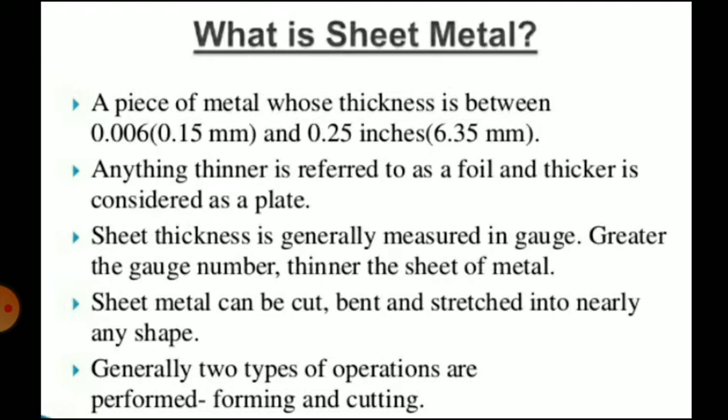Generally two types of operations are carried out on sheet metal: forming and cutting operations. Press working may be defined as a chipless manufacturing process by which various components are made from sheet metal. This process is also termed cold stamping.

Press working operations are carried out with the help of a metal forming machine called a press, which shears or forms the component by applying force. The main features of the press are a frame which supports a ram or a slide, which can move in an upward or downward direction.

Then a bed, which is a stationary member on which the die block is placed, and a source of mechanism for operating the ram in line with and normal to the bed. Source of mechanism means you can employ hydraulic or pneumatic mechanism for moving the ram upward and downward. The ram is equipped with a suitable punch.

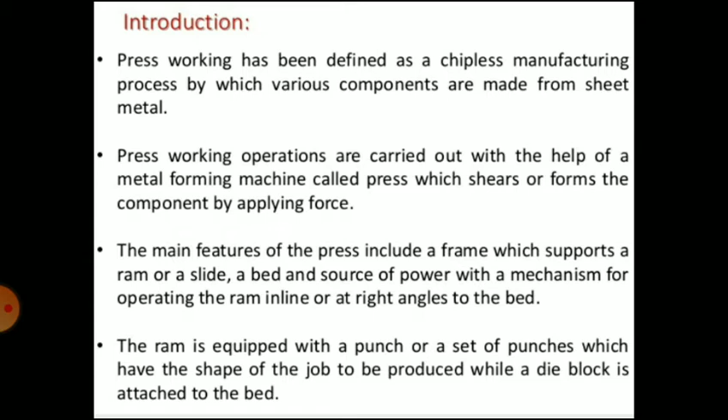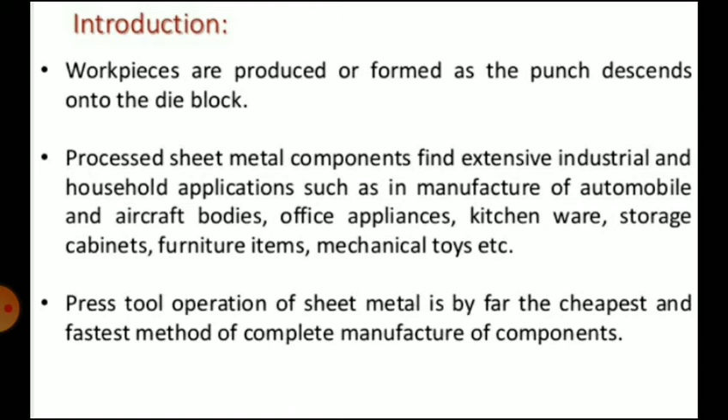Press working operations are usually carried out at room temperature. Workpieces are produced or formed as the punch descends onto the die block. Press tool operations of sheet metal is by far the cheapest and fastest method of complete manufacture of the components.

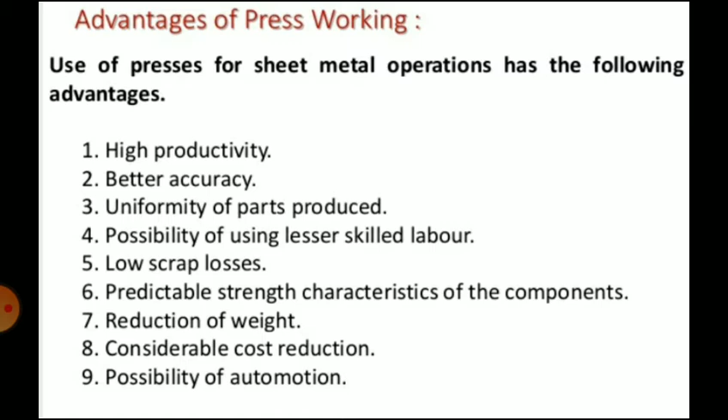Advantages of press working: high productivity, better accuracy, uniformity of parts produced, less skilled labor required, low scrap losses, predictable strength characteristics of components, reduction in weight, considerable cost reduction, and possibility of automation. These are some advantages of press working.

Now types of press working operations. The sheet metal operations done on a press may be grouped into two categories: first cutting operations, and second forming operations.

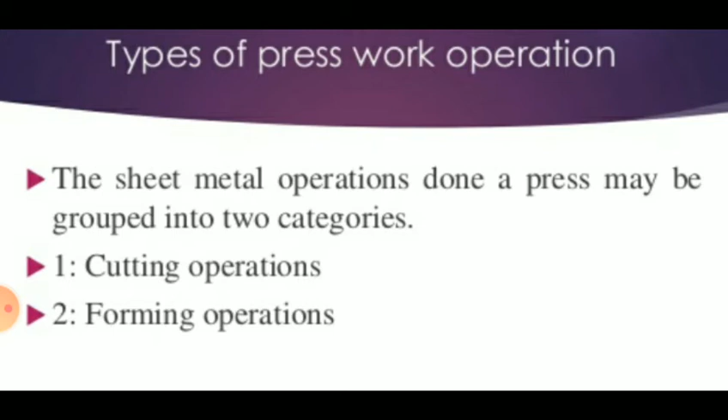In cutting operations, the workpiece is stressed beyond its ultimate strength. These stresses are shearing stresses. Cutting operations include blanking, punching, notching, perforating, trimming, shaving, slitting, and lancing, etc. These are the number of cutting operations that can be carried out under the press.

Generally in a press, at the bottom member there is the bed, on which the die is placed. At the top member there is a ram which can be moved upward or downward with the help of a mechanism. The workpiece or sheet metal is placed on the die, which sits on the bed. By downward movement of the ram, that is downward movement of the punch, the required component is produced as the punch enters into the die block.

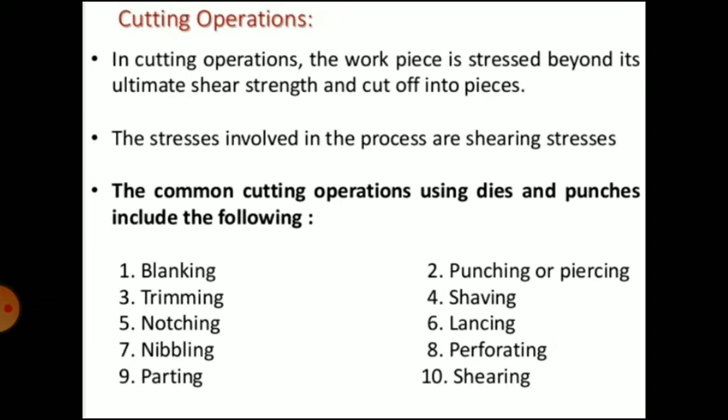Then forming operations. In forming operations, the workpiece is stressed below its ultimate strength. In this operation, there is no cutting of the metal, but only the shape or contour of the workpiece is changed into the desired product. The forming operations include bending, drawing, redrawing, and squeezing.

Now we will see all the operations one by one. First we will see cutting operations.

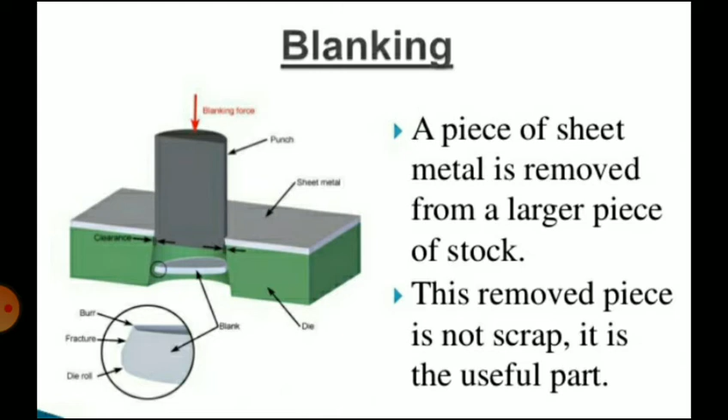The first operation is a blanking operation. A piece of sheet metal is removed from the larger piece of stock. This removed piece is not a scrap, it is a useful part. It is the operation of cutting a flat shape from sheet metal. The article punched out is called a blank, and it is the required product of the operation. You can see in the diagram there is a metal strip, and at the bottom the part that is punched out. This part is the required product, called the blank.

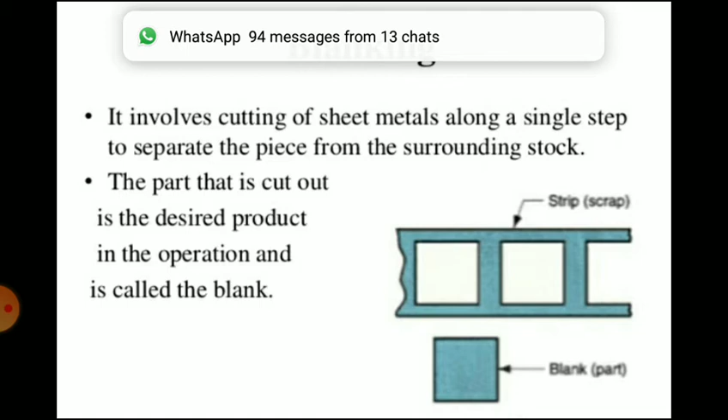The sheet with hole and the metal strip left behind is the waste or scrap. So in a blanking operation, the sheet having holes at the top is the scrap part, and the bottom part that is blanked out is the required product. This operation is called the blanking operation. The article punched out is the product, and the sheet with the hole, or the metal strip left behind, is the scrap. This is regarding the blanking operation.

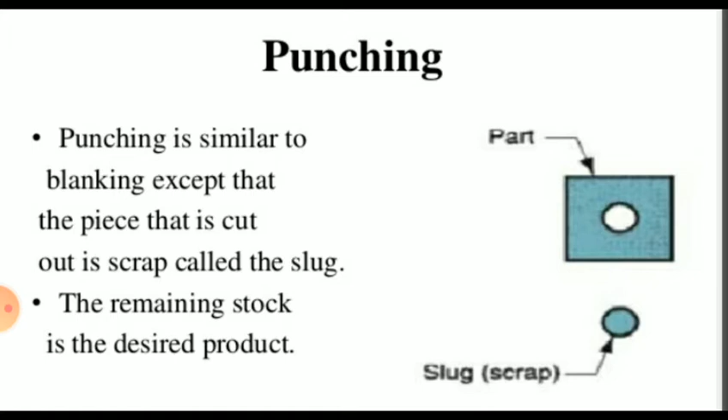Next operation is punching, also called the piercing operation. It is the operation of cutting various shaped holes in sheet metal. The hole is the desired product and the article punched out is the waste. You can see in the diagram, the top part, the sheet having the hole, is our required product, and the article punched out is called a scrap or slug, that is the waste. So the hole is the desired product and the article punched out is the waste in case of punching or piercing operation.

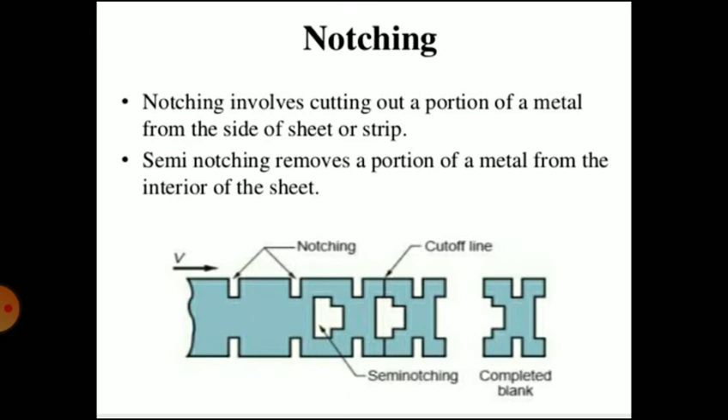Next operation is perforating. It is the operation of cutting very small holes very close together in flat work material. This operation is called perforating. Perforating involves the simultaneous punching of a pattern of holes in sheet metal, generally used to allow passage of light, gas, or fluid. This operation, producing a series of small holes very close together, is called perforating.

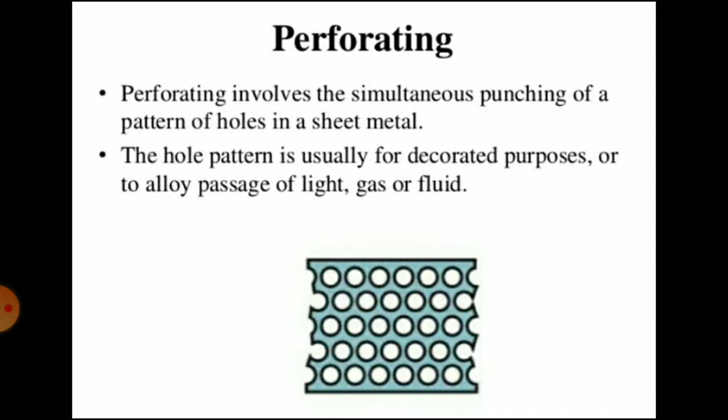Next is the trimming operation. It is the operation of cutting unwanted excess material from the periphery of a previously formed component. You can see there is a die, and on the die the forged or cast component is placed, with the outside unwanted area that we have to cut. After moving the punch downward, the unwanted excess material from the periphery of the previously formed component can be cut. This operation is called trimming.

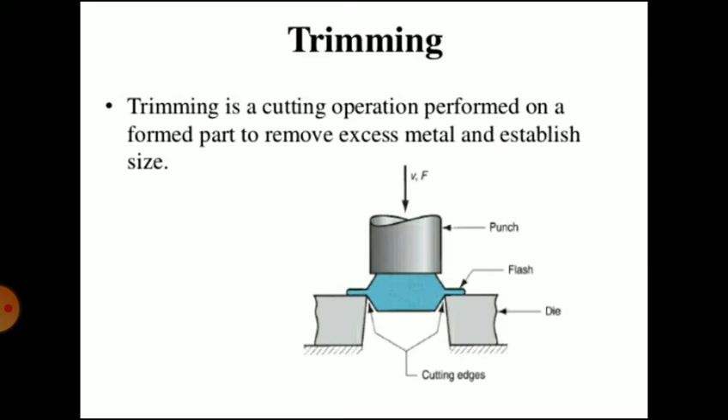Next is the shaving operation. The edges of the blank part are generally rough, uneven, and unsquare. Accurate dimensions of the part are obtained by removing a thin strip of metal along the edges, called shaving. You can see in the diagram a die at the bottom, with the workpiece or blank part placed on it, and its edge is rough and uneven. That uneven edge is removed with the help of a punch shown at the top of the workpiece. It is an operation of removing a very thin strip of metal along the edges, called shaving. It is a shearing operation performed with very small clearance to obtain accurate dimensions and cut edges that are smooth and straight.

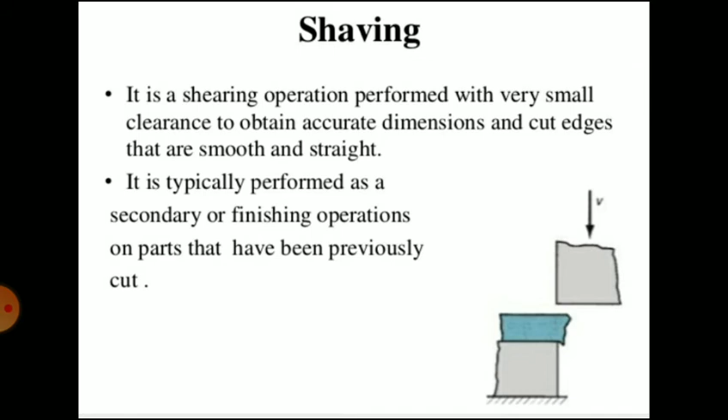Next is the slitting operation. It is the operation of making incomplete holes in a metal sheet. You can see no scrap material is produced in this operation, just cutting straight lines in the sheet. This operation is called the slitting operation, the operation of making incomplete holes.

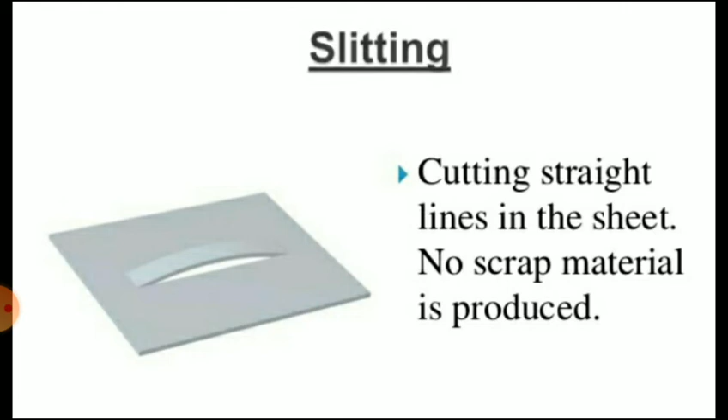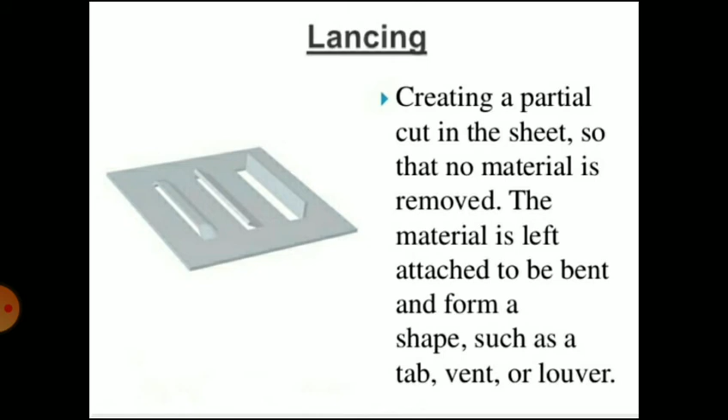Then lancing operation. This is a cutting operation in which a hole is partially cut and then one side is bent down to form a sort of tab, louver, or vent. So it creates a partial cut in the sheet so that no material is removed. The material is left attached to be bent and forms a shape such as a tab, vent, or louver. After partially cutting the material, one side is bent to form a louver. That operation is called a lancing operation.

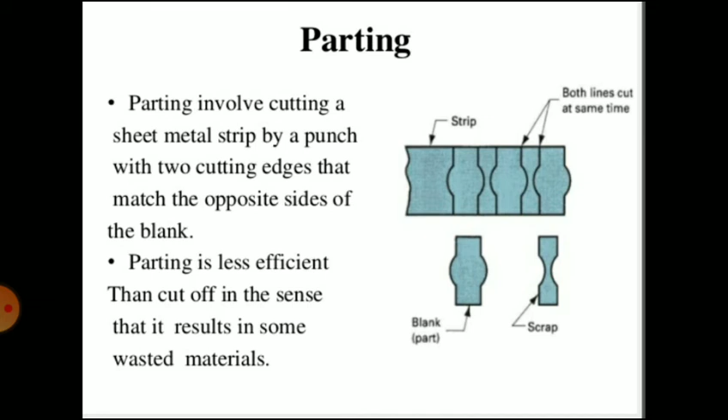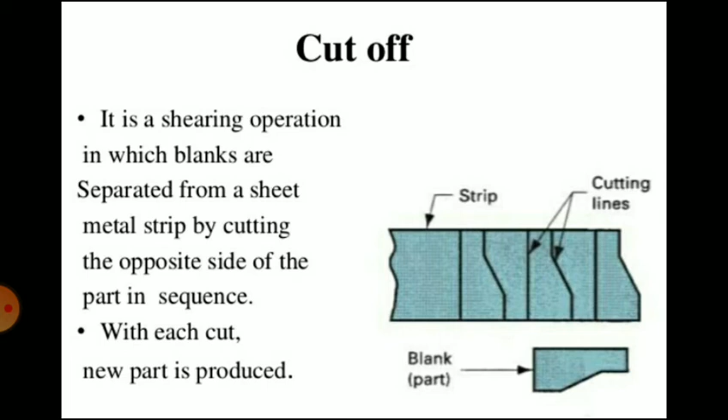Then cut off operation, you can see in the diagram. It is the shearing operation in which blanks are separated from a sheet metal strip by cutting the opposite sides of the part in sequence. With each cut, a new part is produced. That is the cut off operation.

Then we will move on to the next category, that is forming operations. In forming operations, the workpiece is stressed below its ultimate strength. In this operation, there is no cutting of the metal, but only the shape or contour of the workpiece is changed into the desired product. These operations include bending, drawing, redrawing, and squeezing.

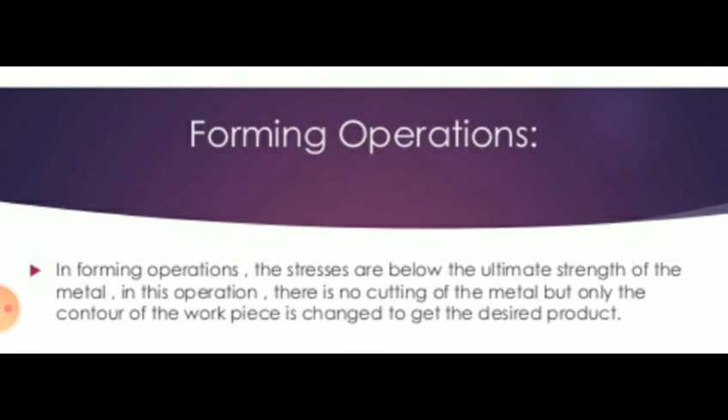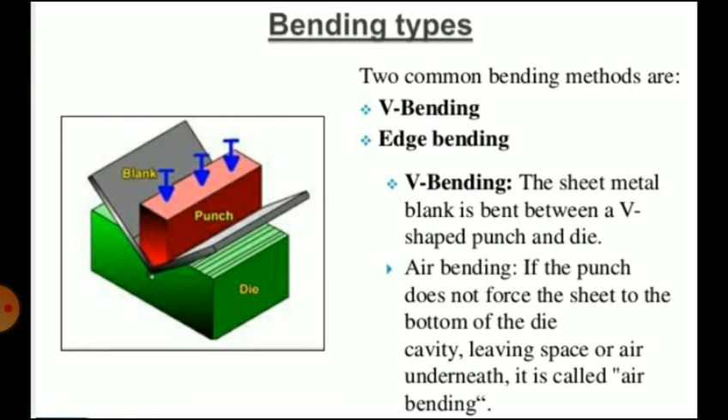Bending types: two common bending methods are V bending and edge bending. In V bending, the sheet metal blank is bent between a V shaped punch and the die. You can see in the diagram there is a die having a V shape and there is a punch, and the bottom of the punch is also V shape. By moving the punch in a downward direction, you can form the V bending operation.

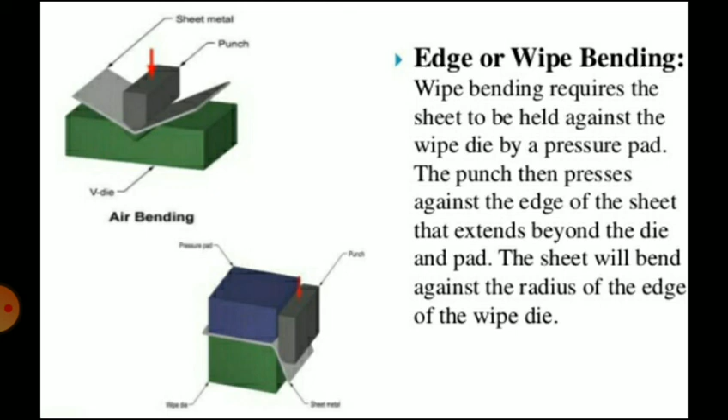Next is edge or wipe bending. Wipe bending requires the sheet metal to be held against the wipe die by a pressure pad. The punch then presses against the edge of the sheet that extends beyond the die and the pad. The sheet will bend against the radius of the edge of the wipe die. You can see in the bottom diagram, shown in green color, it is a die, and blue color indicates the pad which holds one side of the sheet, and on the right hand side there is a punch which will move in a downward direction, bending the edge of the sheet. That is called edge bending.

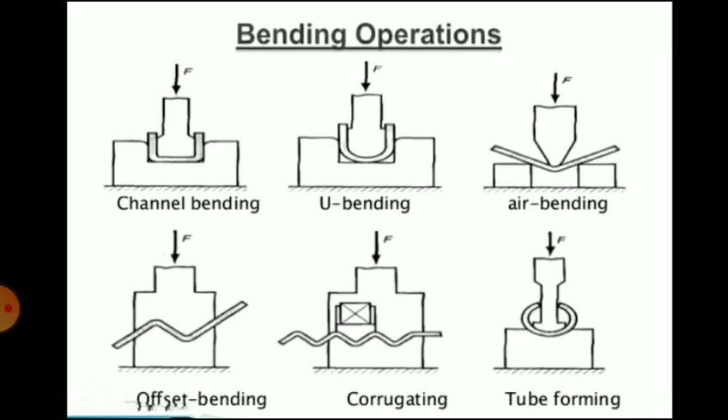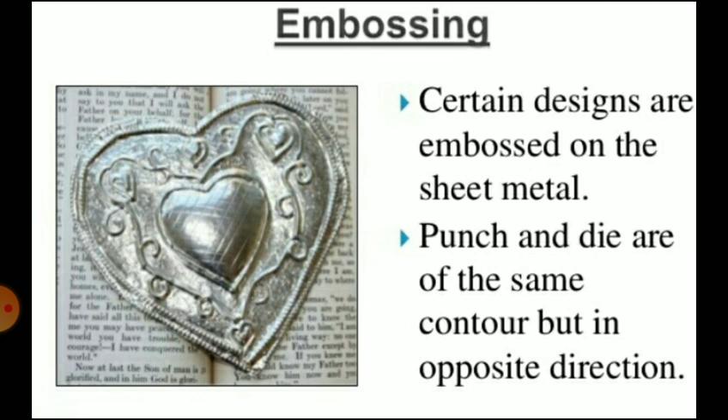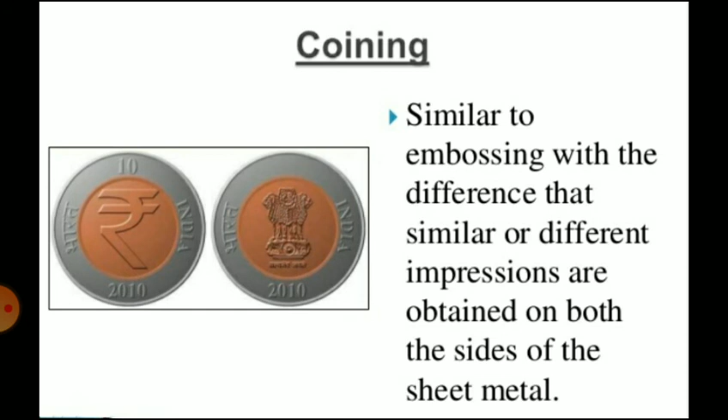Then embossing: certain designs are embossed on a sheet metal. The punch and die are of the same contour but in opposite direction. That is called embossing. Then coining operation: it is similar to embossing, with the difference that similar or different impressions are obtained on both sides of the sheet metal. That is called a coining operation.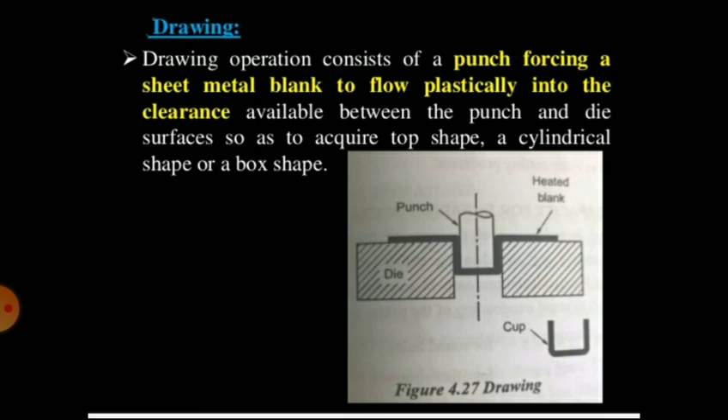Then drawing operation: it is the process of forming a flat workpiece into a hollow shape by means of a punch which causes the blank to flow into the die cavity. That operation is called a drawing operation. From drawing operation you can form cup shaped objects. Deep drawing is a metal forming process in which sheet metal is stretched into the desired shape. That is called a deep drawing operation.